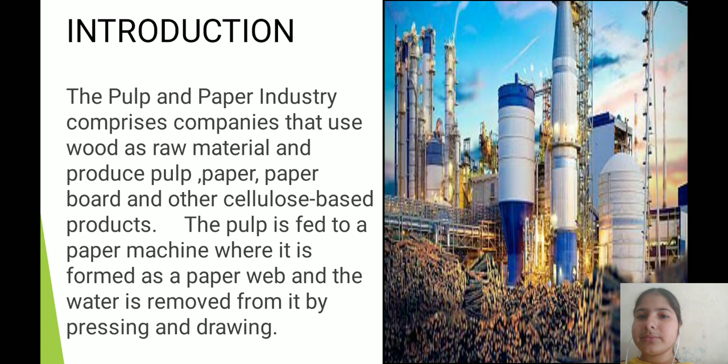History. The first paper making process was documented in China during Eastern Han period, traditionally attributed to the court official. During the 8th century, Chinese paper making spread to the Islamic world where pulp mills and paper mills were used for paper making and money making.

By the 13th century, paper making was refined with paper mills utilizing water wheels in Spain. Later, European improvements to the paper making process came in the 19th century with the invention of wood based papers.

Manufacturing steps: timber, debarking, chipping process, chemical pulping process, mechanical pulping process, hydrapulping, blend chest, waste paper, de-inking, refining, screening and cleaning, paper making machine, and conversion and printing.

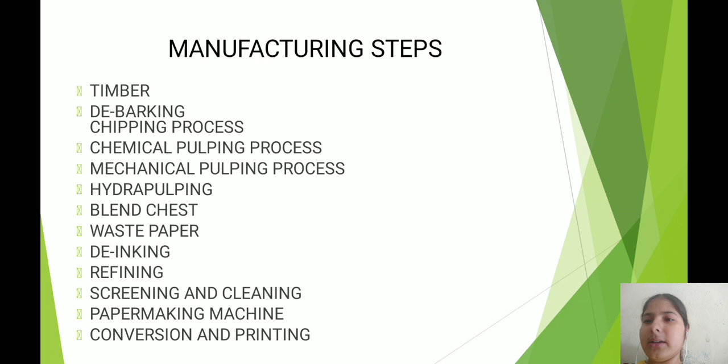First one is timber. Timber used for paper making comes from well-managed forests where more trees are planted than harvested to ensure sustainable growth.

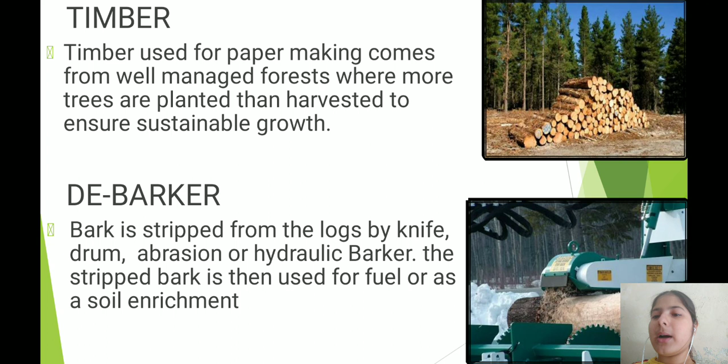Debarker. Bark is stripped from the logs by knife, drum, abrasion, or hydraulic barker. The stripped bark is then used for fuel or as a soil enrichment.

Chipping. Stripped logs or timber are chipped into small pieces by knives mounted in massive chipping machines. Chips are then stored in huge bins ready for the next process.

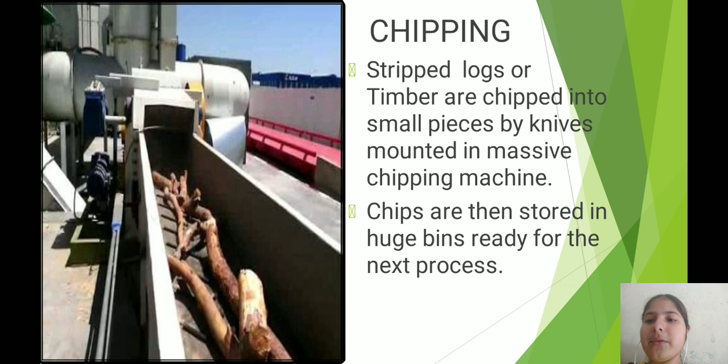Chemical pulping process. Chips from the storage bins are fed into a digester. The wood chips are then cooked to remove lignin. Lignin is the binding material which holds the cellulose fibers together. The chemical process is energy self-sufficient as nearly all byproducts can be used to fire the pulp mill power plant.

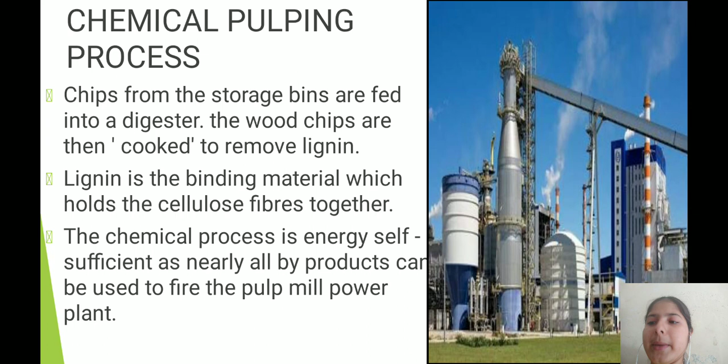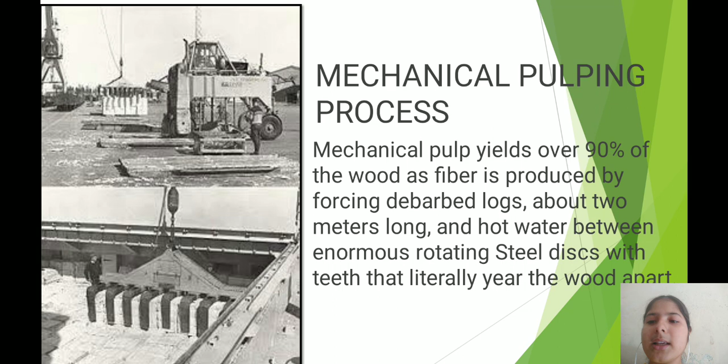Mechanical pulping process. Mechanical pulp yields over 90% of the wood as fiber. It is produced by forcing debarked logs, about 2 meters long, and hot water between enormous rotating steel discs with teeth that literally tear the wood apart.

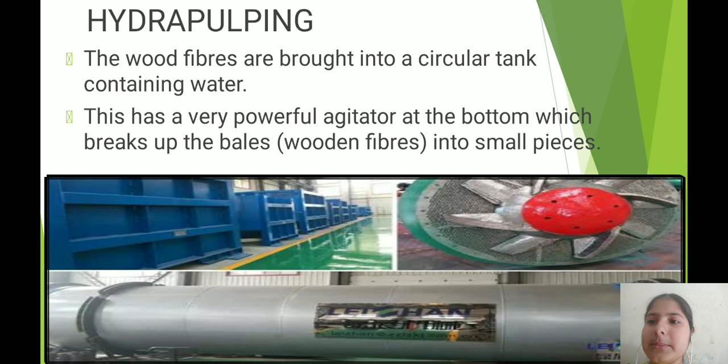Hydrapulping. The wood fibers are brought into a circular tank containing water. This has a very powerful agitator at the bottom which breaks up the bales into small pieces.

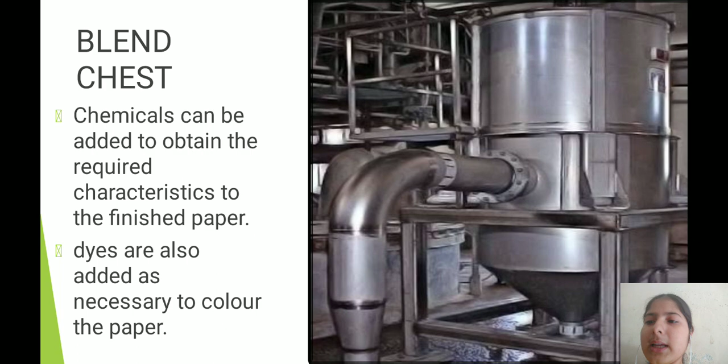Blend chest. Chemicals can be added to obtain the required characteristics to the finished paper. Dyes are also added as necessary to color the paper.

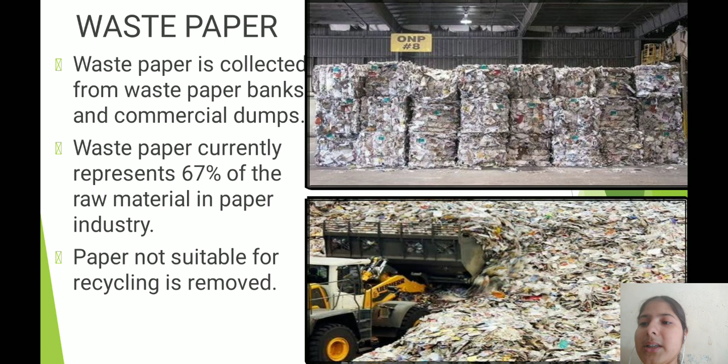Waste paper. Waste paper is collected from waste paper banks and commercial dumps. Waste paper currently represents 67% of the raw material in the paper industry. Paper not suitable for recycling is removed.

De-inking. Before printed paper can be recycled, the ink needs to be removed, otherwise it will be dispersed into the pulp. There are two main processes for de-inking waste paper: washing and flotation.

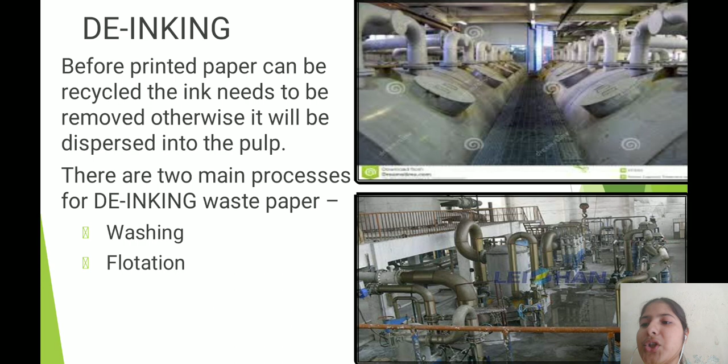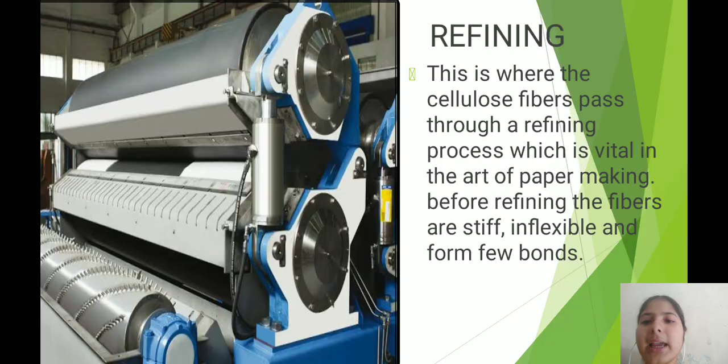Refining. This is where the cellulose fibers pass through a refining process which is vital in the art of paper making. Before refining, the fibers are stiff, inflexible and form few bonds.

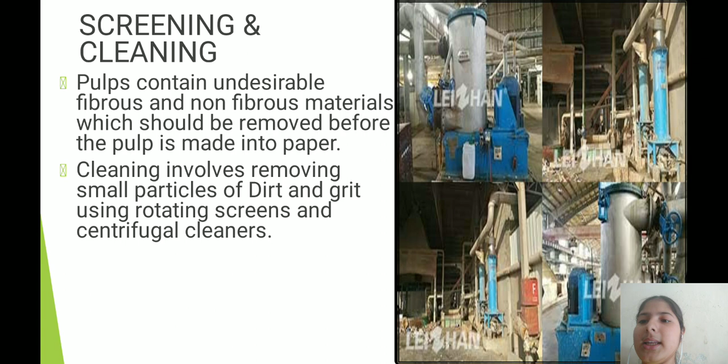Screening and cleaning. Pulp contains undesirable fibrous and non-fibrous materials which should be removed before the pulp is made into paper. Cleaning involves removing small particles of dirt and grit using rotating screens and centrifugal cleaners.

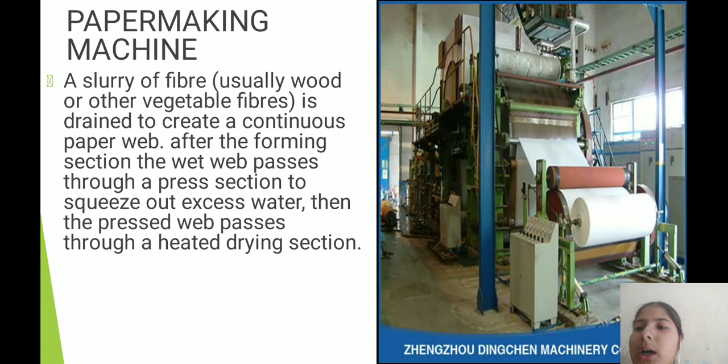Paper making machine. A slurry of fiber is drained to create a continuous paper web. After the forming section, the wet web passes through a press section to squeeze out excess water. Then the pressed web passes through a heated drying section.

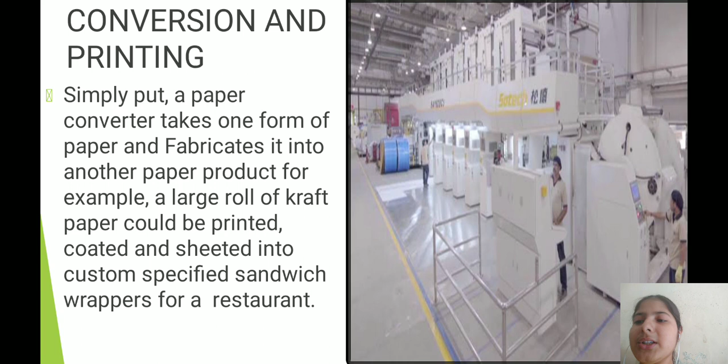Conversion and printing. Simply put, a paper converter takes one form of paper and fabricates it into another paper product. For example, a large roll of kraft paper could be printed, coated and sheeted into custom specified sandwich wrappers for restaurants. There is SWOT analysis.

Strengths: large and growing domestic paper market, relatively low personnel and fuel cost, well developed printing industry. Weaknesses: fiber shortage, small and fragmented industry structure, environmental problems of most of the small pulp mills and also some big mills, impact of high local taxes like sales tax, entry tax, etc.

Opportunities include enormous domestic market potential, WTO foreign participation, FDI to speed up restructuring, and low labor cost. Threats include unprepared mills for international competition, decline in capacity, and short term planning for raw material.

Geographical distribution of paper industry in India. Maharashtra is a major paper producing state in India. It has 63 mills, accounts for 16.52% of the installed capacity and produces 18% of the paper produced in India.

Second is Andhra Pradesh. This has 19 mills, accounts for 11.3% of installed capacity and 13% of India's total production of paper.

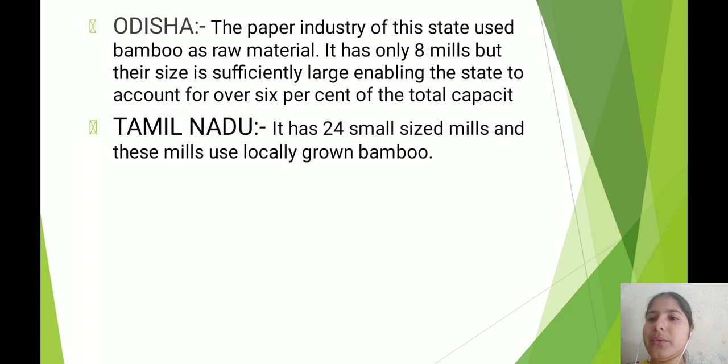Tamil Nadu has 24 small size mills and these mills use locally grown bamboo.

Punjab has 23 mills. Haryana has 18 mills.

Assam is one of the centers which fulfill the bamboo requirements for the paper industry. Nowgaon has one of the largest paper mills of India.

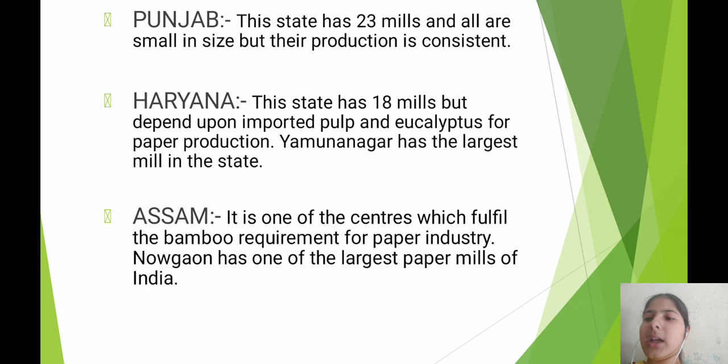Next is the effects of digital transformation on the paper industry. Demand for print paper will continue to decline with increasing internet use and the rise of social media. Intelligent packaging and personalization will be in demand with increasing demand from the e-commerce sector.

Present scenario of the paper industry in India. Under the baseline scenario, by 2024-25, domestic consumption is projected to rise to 23.5 million TPA and production to 22.0 million TPA. About 1 million TPA of integrated pulp, paper and paperboard capacity is required to be created in India annually over the current capacity to meet the growing demand.

New initiatives: first is agroforestry and second is clean technology. In agroforestry, at current estimates, wood-based segments of the industry use 80% of the total requirement from farm-produced wood. For clean technology, two key Swedish institutes are involved in environmental and pulp and paper research.

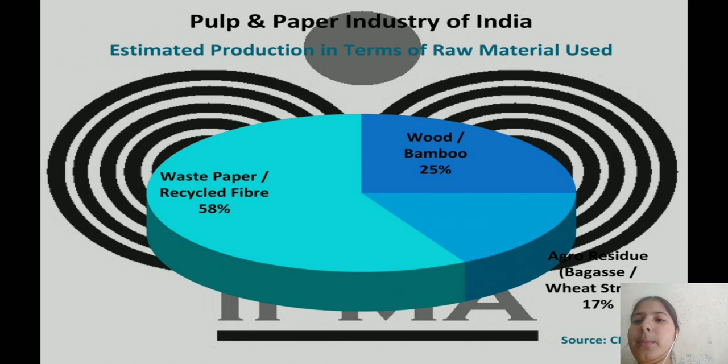Estimated production in terms of raw material used: waste paper and recycled fiber 58%, wood and bamboo 25%, wheat straw 17%.

And last is the conclusion. Taking appropriate steps can minimize the generation or effects of generation of a variety of waste in pulp and paper mills; industries are one of the major sources of solid waste generation. Due to lack of proper attention of industry authorities, the waste often creates problems of environmental pollution. Thanks for watching.